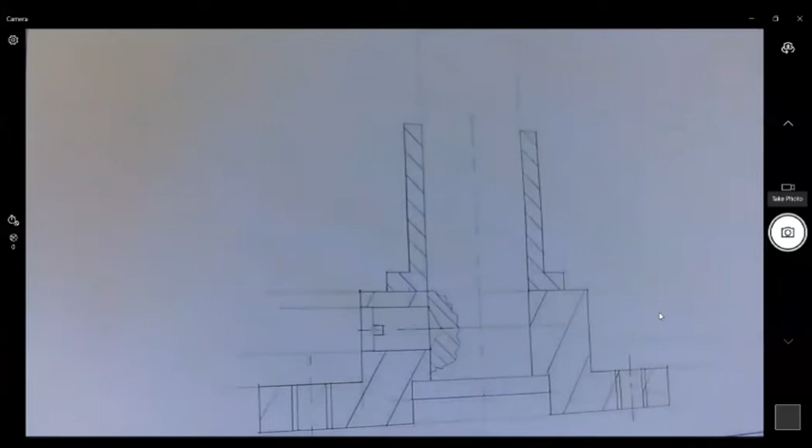All right. Just to recap what we have done for the last 2 days. We have started with mechanical drawings. Last year we did it as well, but last year was a lot simpler and the focus was more on drawing the different views. Now that we have practiced different views, what was added this year is that you get a 3D or exploded isometric view of a mechanical component. In this case, it's a pulley.

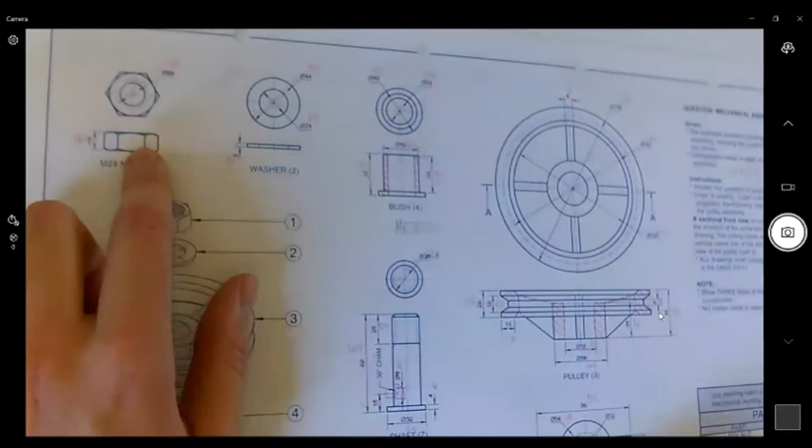What you also get is an orthographic view of two different views, the front view and in this case, the top view. But they only want us to draw the front view. Hence, I crossed out all the views I don't have to draw, but not so that I can't see the measurements. The scale is also 2:1, so I had to go and multiply all my measurements by 2.

Then we quickly planned out our hatching, because if you cut something in half in EGD and you have to represent that on a drawing, you add hatching lines. Think back to when we did civil, the houses. If you show the foundation, you would add symbols to represent different types of materials, like natural ground, like cement, like wood, etc. Same thing with metal or any type of mechanical component.

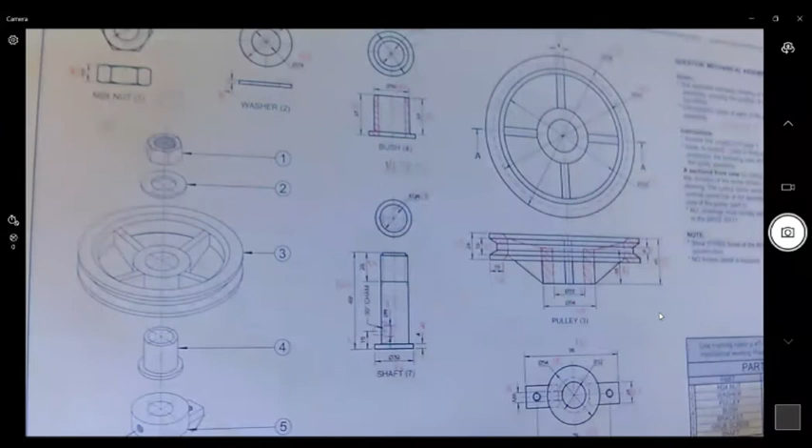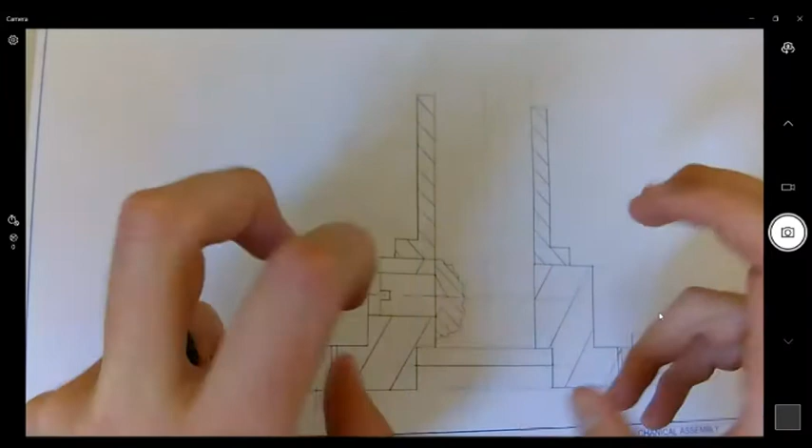Yesterday, we started by drawing the shaft, but an incomplete shaft, because I always start with the shaft, but I complete it at the end as well, because that will prevent me from erasing too much stuff at the end. Then I started sliding the components onto my shaft as you would have done it in real life. So it's the bracket, the grub screw, and then we ended with the bush. And I've added the hatching as well.

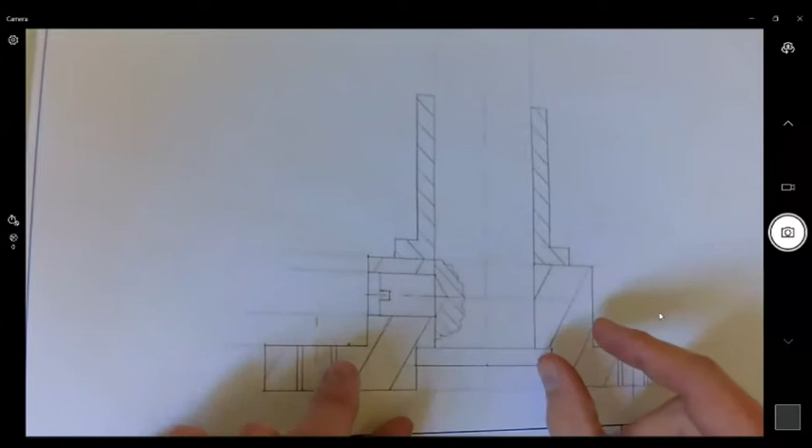Note that each new component's hatching looks different and drawn at a different angle, and the spacing between them is different as well. The reason we do this is every component is a unique component that has to be distinguished in that way. So you can't have the same hatching for different components. You just change the angle or the gap between the lines.

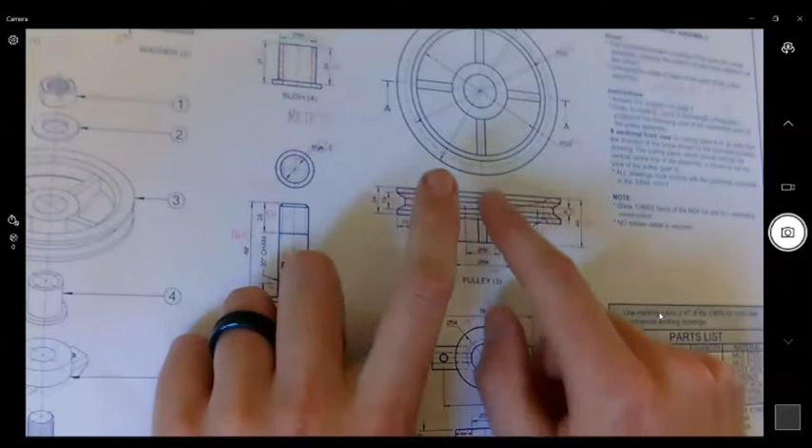Today we're going to start by drawing the pulley. Now remember, the pulley looks complicated, but for now, let's just draw the outline and then we'll draw the inside and add the hatching. So we don't have to draw all those lines. All those lines would only be necessary if we had to draw this pulley without the sectioning. But because we cut it, it's simpler, not simple, just simpler. So we're basically going to copy this pulley. It's going to take a while because there's a lot of turns and bends and angles we have to work with. So let's do this.

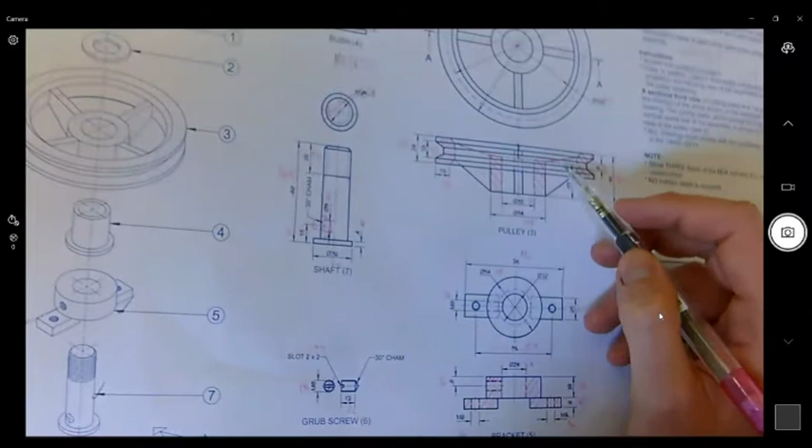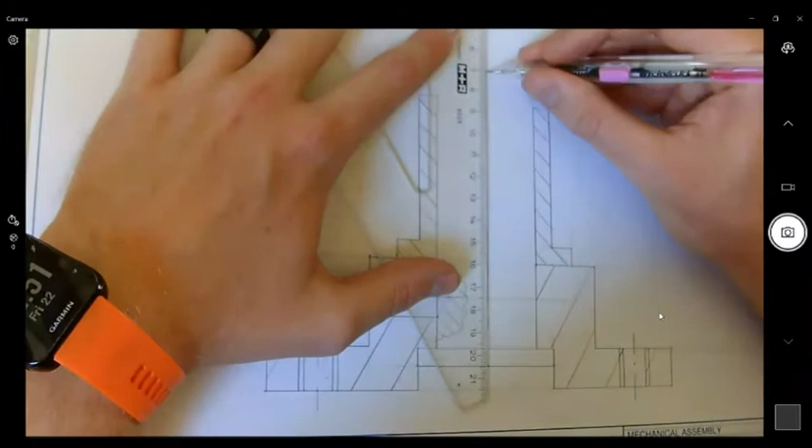Now above that pulley, there's a bit more space left. So I'm trying to figure out what the height is from there upwards. So let's see. What I can also do is take the total height and work from the bottom upwards. So it's 90. I need some more center line. Because that's the top part of the pulley. I'm going to work from there and draw downwards.

Okay, so what's the length of the pulley or the diameter? It is 316. Divide that by 2 and you get 158.

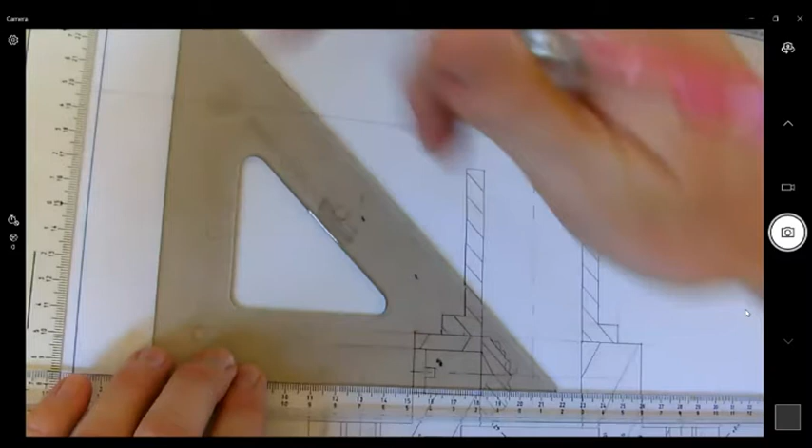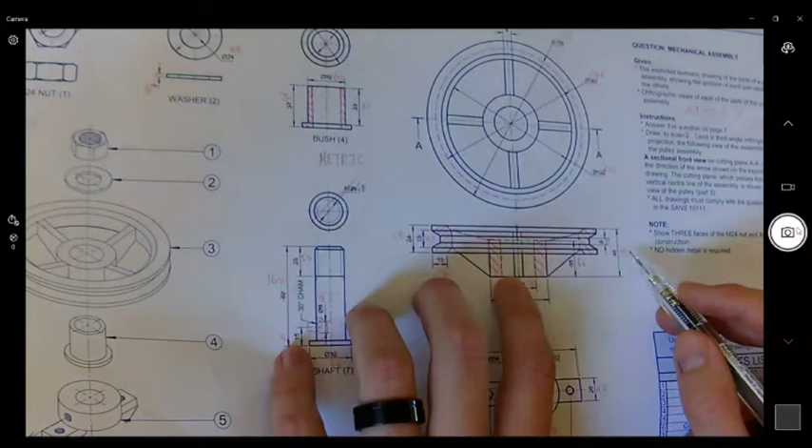Sorry to stop, sir, but where did you get the measurement for the height from again? Good question. And guys, I will try to remember to open the floor up for questions, but you can also ask in between. So the height I got from there. Next to the pulley, from the bottom to the top, you get 90. And I can see if I look at the height of the bush, it fits exactly inside the pulley. It's only this little base that sticks out.

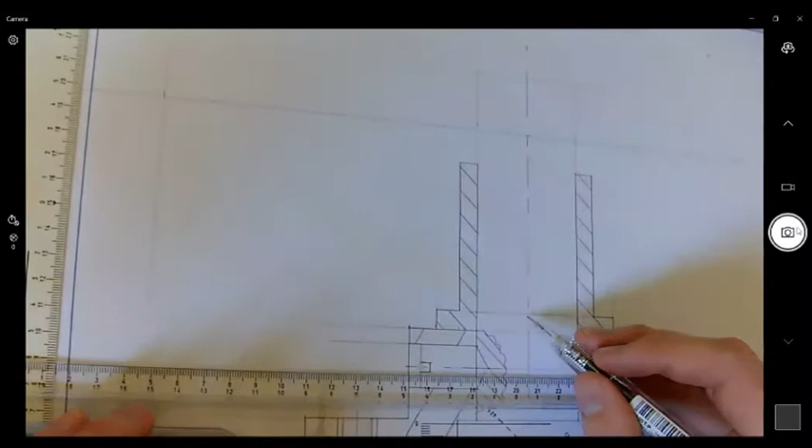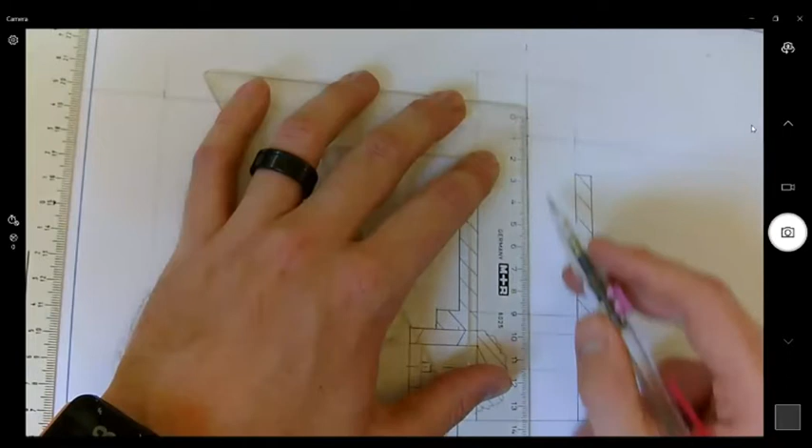So what I did is, if the height of the pulley is 90, I measured from, oh wait, I think I might have done this wrong. Hold up. So from there, above the base of the bush, we measured. I think I made a mistake, so it's good that Hannah stopped me. Yep, I made a mistake. There's the height. Sorry, guys. Okay, so it's 90 from above the bush. Thank you for stopping me. I almost had to erase a lot of stuff later on. Let's try this again.

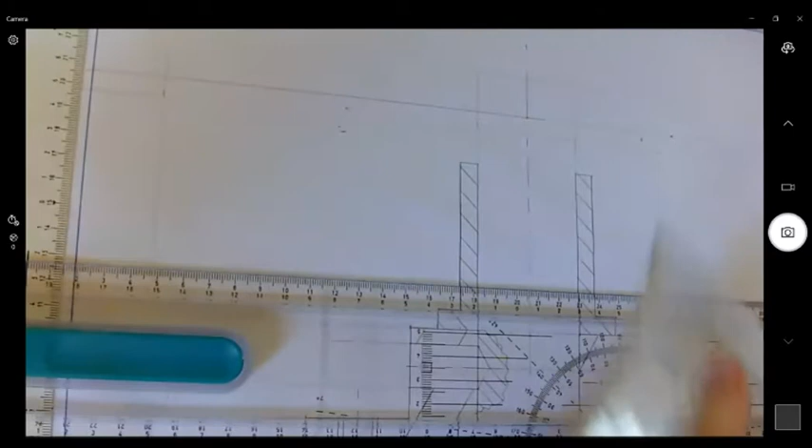Okay, so there's the, let's see if I can move this a tiny bit closer. Not closer, just that you can see the whole thing. There we go. I'm going to start moving downwards. So what I'm going to focus now on is that side and this side. So the outskirts of the pulley, that groove of the pulley on the outside.

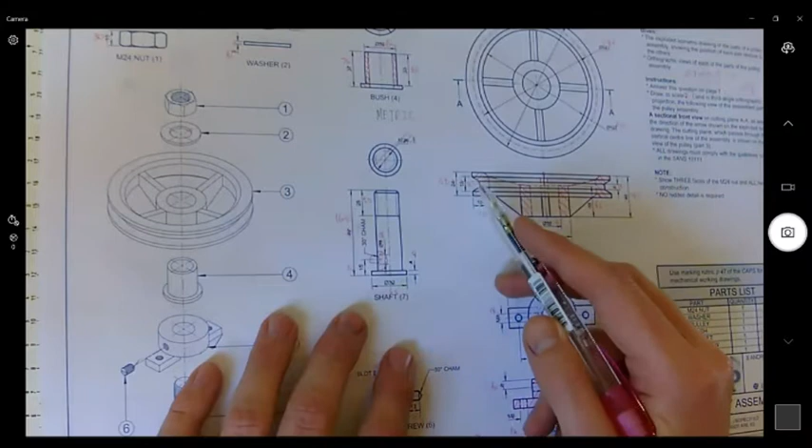Let's first work it out. The total space is 48 and the inside is 30. So 48 minus 30 gives me 18. And then there's 2 parts. So 18 divided by 2 gives me 9. Okay, so it's 9.

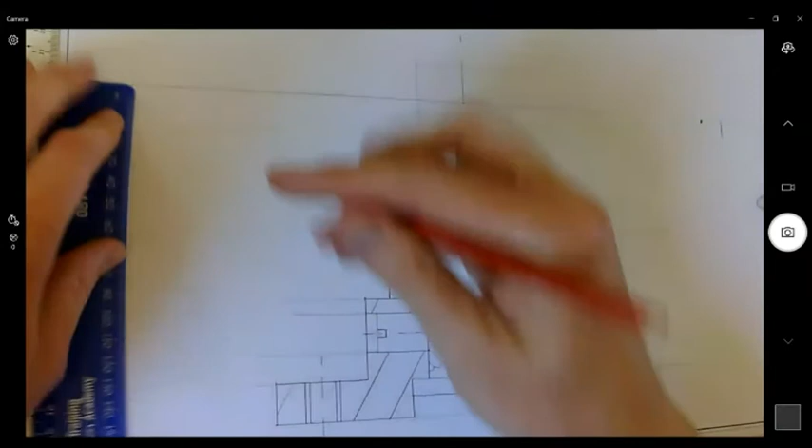I'm going to darken this part as well because it's part of the drawing. It's not going to be cut away, but I'm not going to go over the area where the shaft is because that will be removed. Now so I've done this part.

So this is done. Sorry, I think it's the camera. Sorry, guys, the camera looks like it froze.

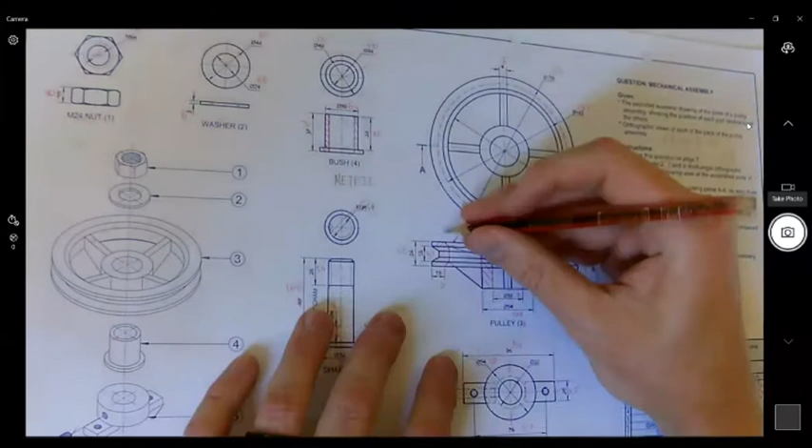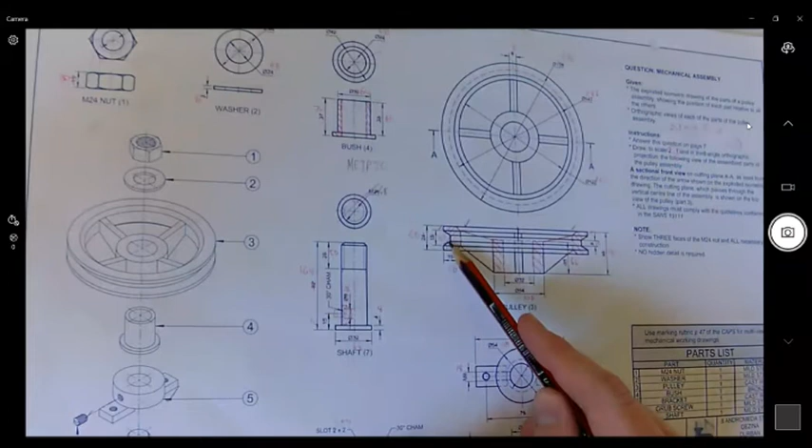There we go. So I've done this part, I've done that part. This is done, this is done. Now I'm going to focus on the inside. Now, they didn't give us an angle at which to draw it, but they did give us a size if we look at that part there. Now, let me just figure this out. Where do we get this? I'm just looking for this part there, the distance. Don't worry, we'll get it soon.

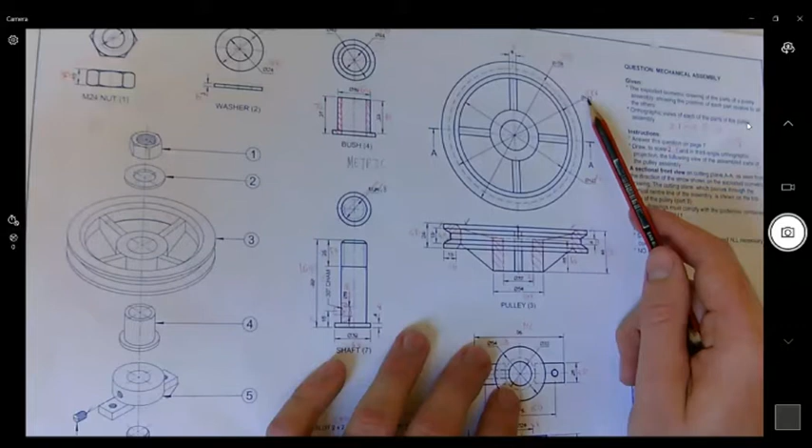Oh, it's this. So that hidden detail there represents that groove here. So the hidden detail is 286. So halfway, that's 143. So what I'm going to do is I'm going to put my ruler down on 143, and then 143 and make a mark on the outside. So that gives us a space of 15. So on this side, the same story. Can't see the line. Let me just make it a bit darker. 15.

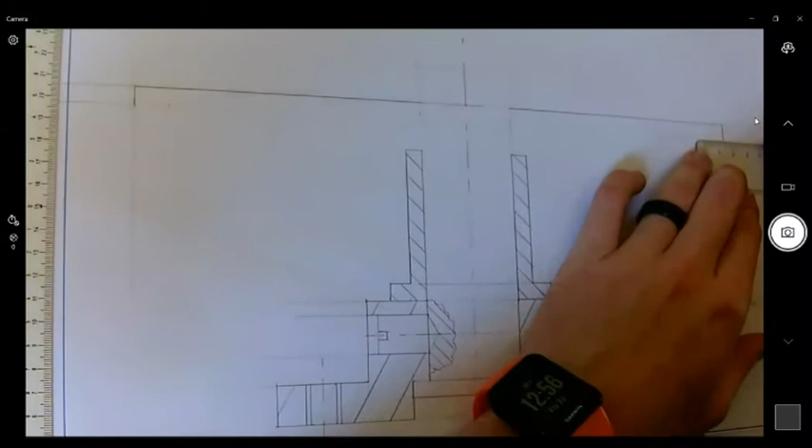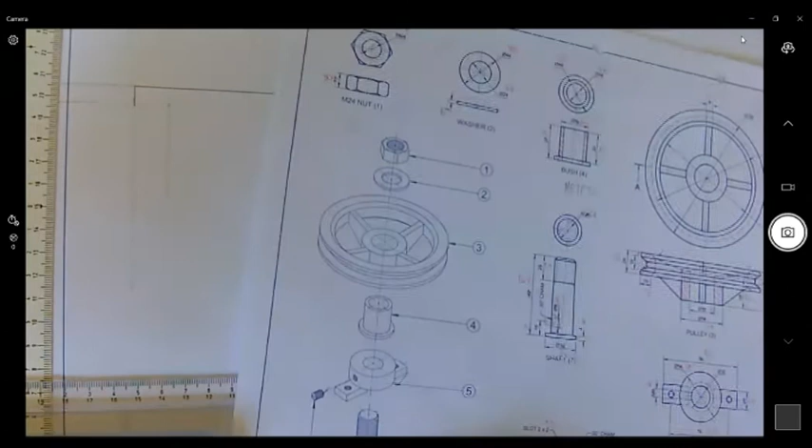Okay, we're still busy with that groove in the middle. Now, what's the gap? Let's just check. Okay, so the gap, I'm looking there. So the gap in the middle is 12, and then we can take 30 again. 48 again. So 48 minus 12 gives us 36. 36 divided by 2, that gives us 18.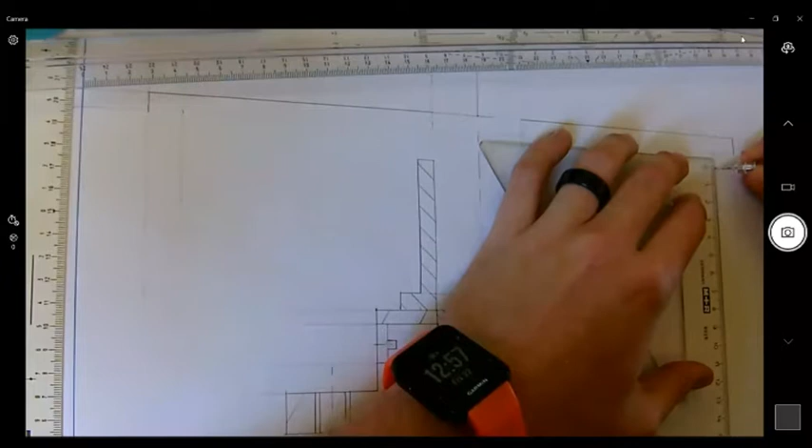So the groove starts there, and it has a height of 12. Now I'm not going to do it on the other side again by measuring it. I'm just going to project it. So I'm going to take the points there and put it on the other side. Now, I'm just going to first connect a few lines so we can start seeing the picture itself.

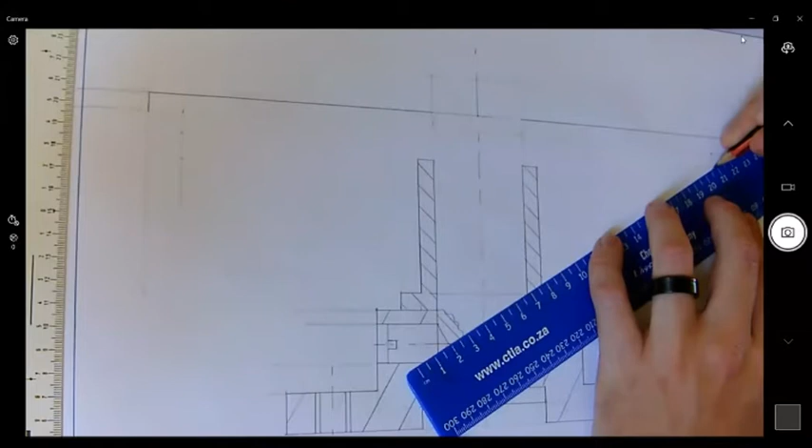Okay, so it's taking form, but we're not there yet. But luckily, it's symmetrical on the bottom side, so I don't have to go and do any calculations again. I'm just going to take these measurements. So that is 8. There, and then the top, this part should be the same. So that is 9 and 9.

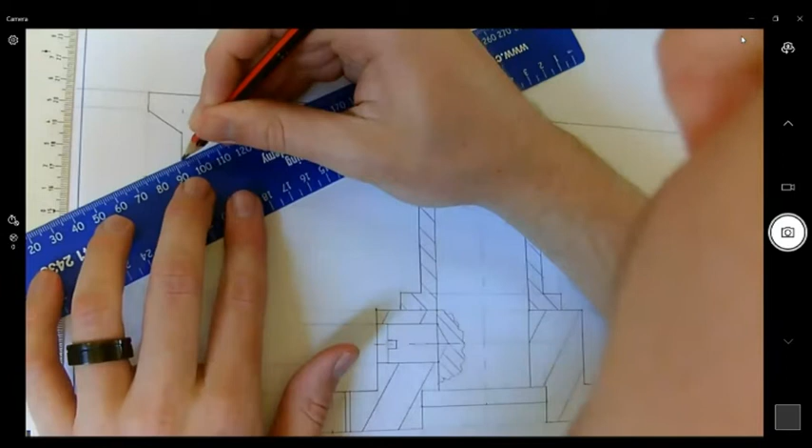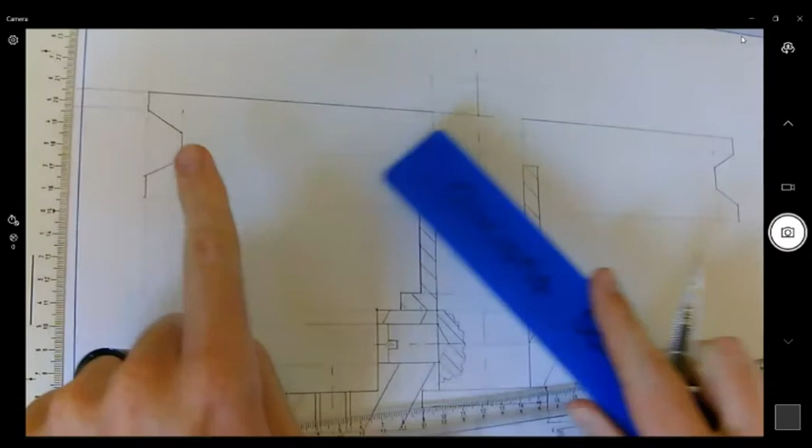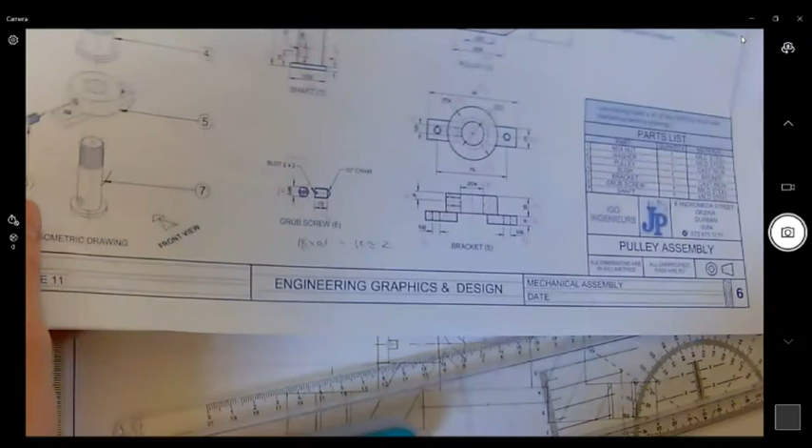Yeah, there we go. This pulley, it's starting to look like a pulley. Okay, I'm not going to darken the line at the bottom yet because there's a few things that still need to happen there. So I'm just going to draw a light line for myself. Okay, there's the outside. Now we can start adding the detail that's left behind on the inside. So next thing I'm going to do is that part there on both sides. Now to work it out, oh, they gave it to us, so we don't have to work it out. It's given to us. It's 26.

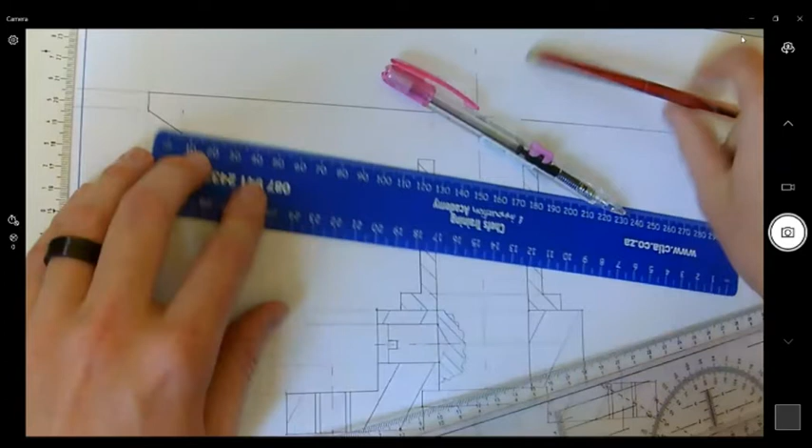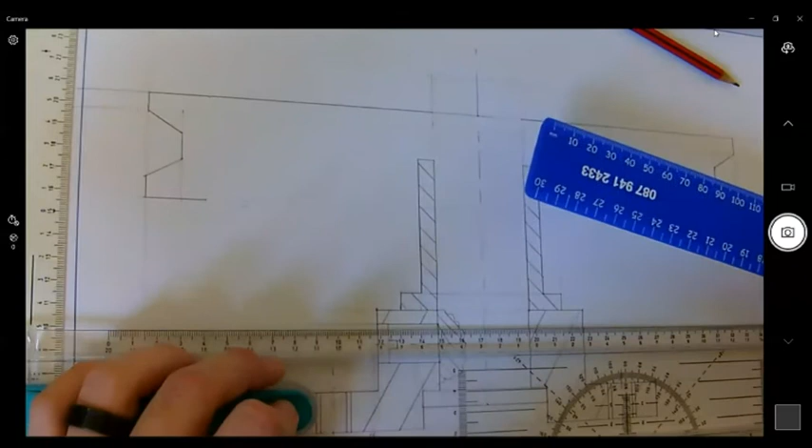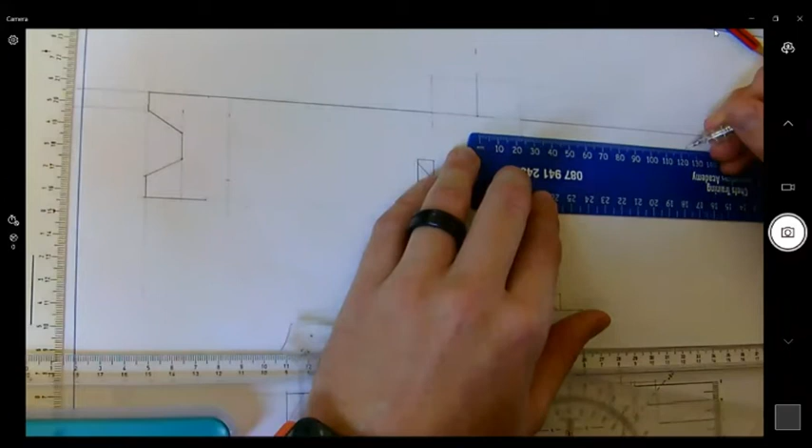Now I'm looking for that part there. So we've got that. Oops, you can't see it. Sorry. I'm looking for that part. I have that part. I'm looking for the distance there, so from there to the outside. So let's see. It's this diameter there. So that is 244. Halfway is 122. Just double checking. Yeah, good. 122. Them together.

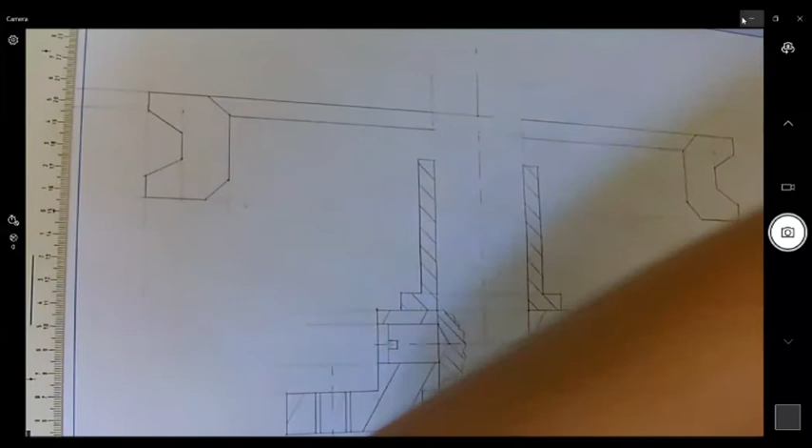Okay, there's the two outside parts of the pulley. Then there's going to be a line here at the top. Just going to show it to you. This line, I'm going to explain to you now where I got this from. Okay. That line at the top stays there because if you cut this pulley in half, you'll still see the back, that ledge, if I can call it a ledge, you'll still see it. This is what you're looking at. It's that ledge of the pulley at the back that's left behind when you cut it.

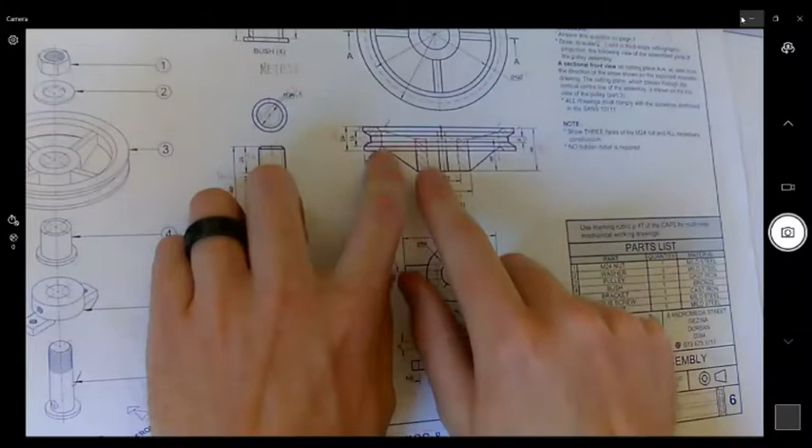Okay, now I'm going to add the support structures, these structures, the hidden detail parts. They're going to now be added. So it starts there and it ends at the top of where the bush should be, but on the outside. So let me just first add those two parts.

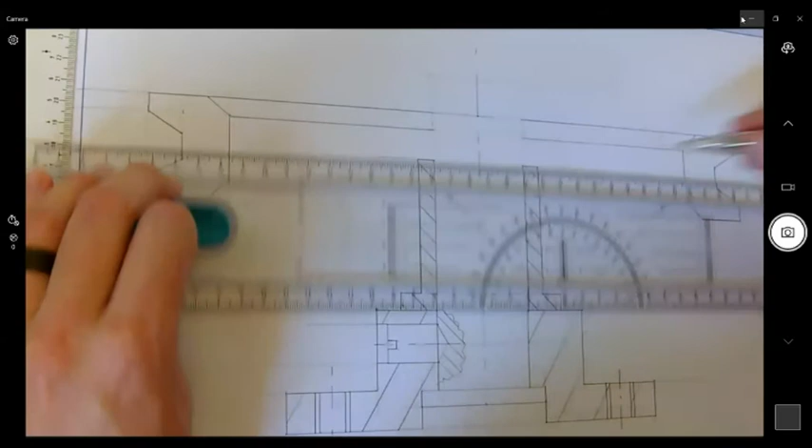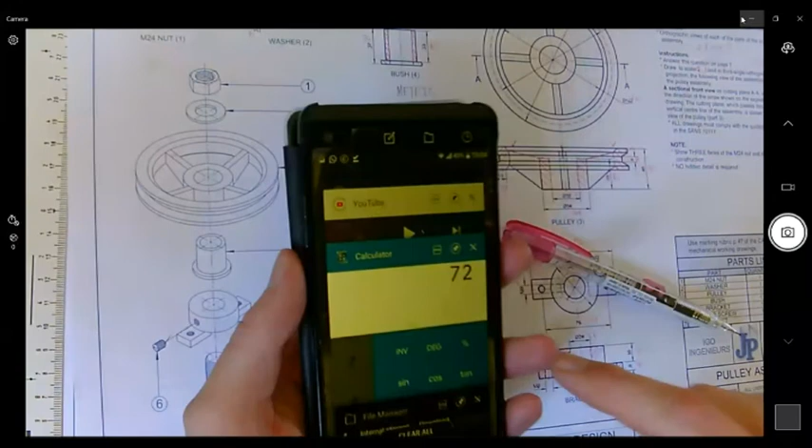Now to work them out, where you get them from is the inside is 64 and the outside is 108. So if I work this out, so 108, my calculator. Okay. So 108 minus 64 gives me 44, but there's two sides, so divided by 2. So 22 and 22.

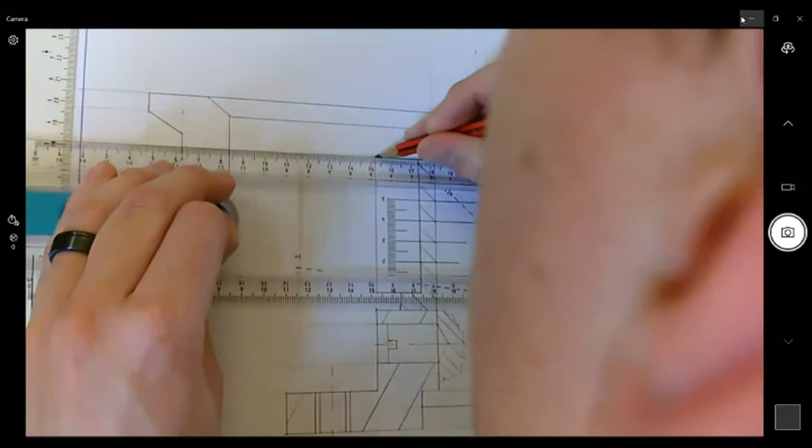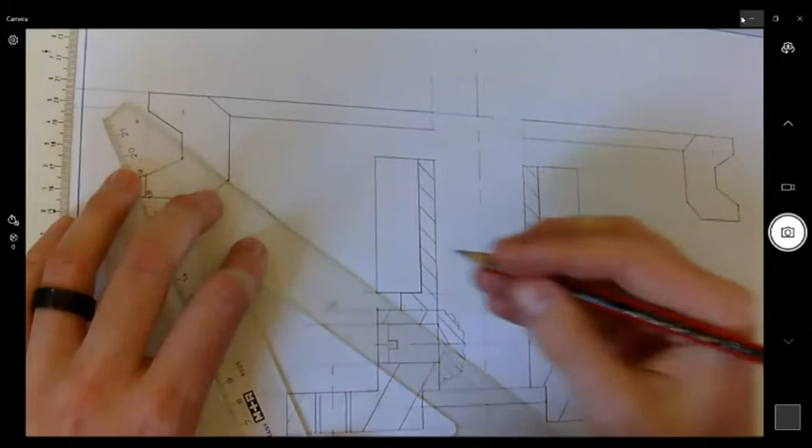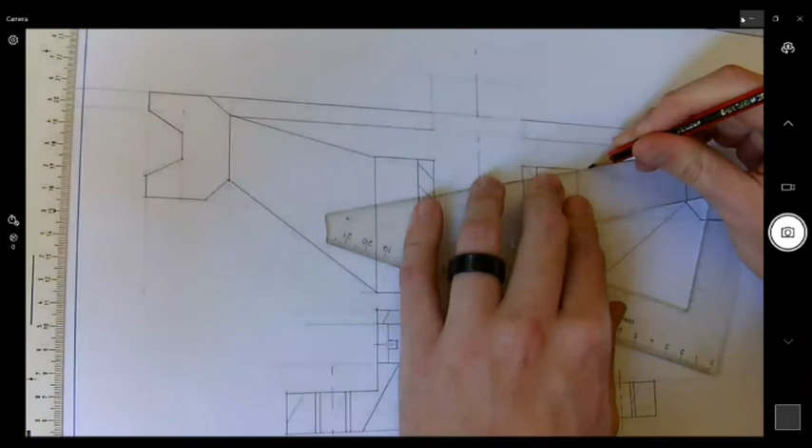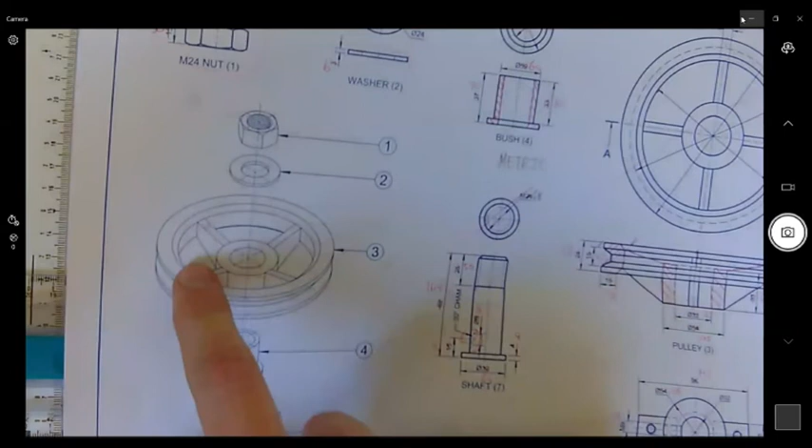Now let's just connect the brackets. We are almost done. Then at the bottom, these two corners, it looks like little triangles, will also be visible because if you go back to the drawing again, just like there's a groove at the top, at the bottom, at the back, you will also see a part of the pulley. So that's, again, the back that you'll be able to see.

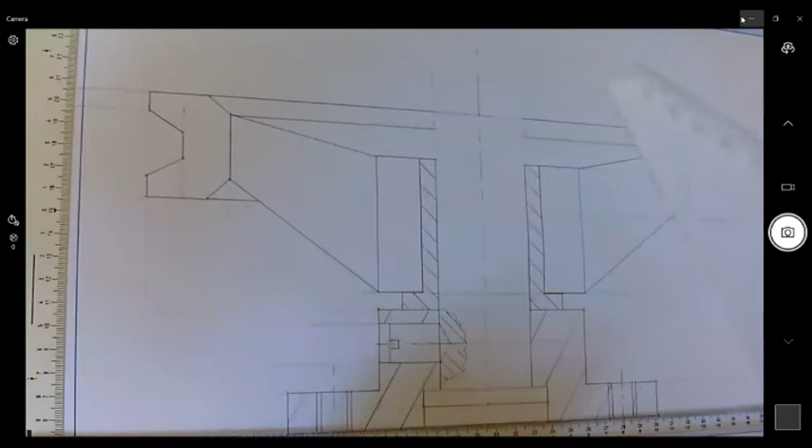Is there anything else I'm going to check if what I missed? No, just need to hatch it. So I'm going to hatch it, and then I'll quickly open the floor for questions about what we've done now in class, or about yesterday. That's also fine. So let's check. I'm going to use this. No, I can't use. Yeah, I'm going to use this angle. No, because that bush is similar.

So let's do this. Now the pulley is the biggest part. So I'm going to draw it. This is a better angle. I'm going to draw big spaces between my hatching. Otherwise, I'll take hours drawing it. So make it nice and big.

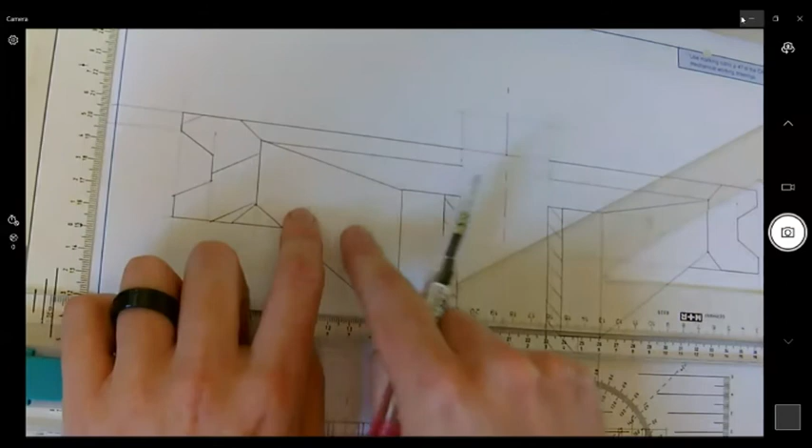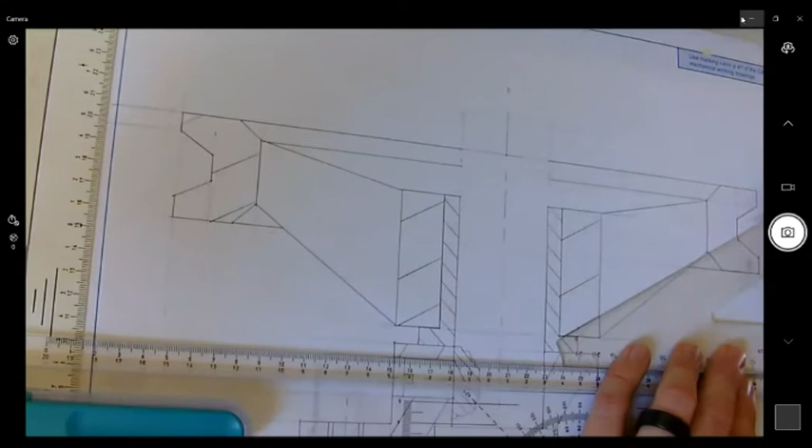This is cut, but we don't hatch it because this counts as a support structure. So it stays just the way it is. So any support structure, bolt, nut, washer, you don't cut it. They also call the support structure sometimes a web or a rib, as in a rib that you have in your body. That's something you don't cut or hatch. You cut it technically, but you don't hatch it.

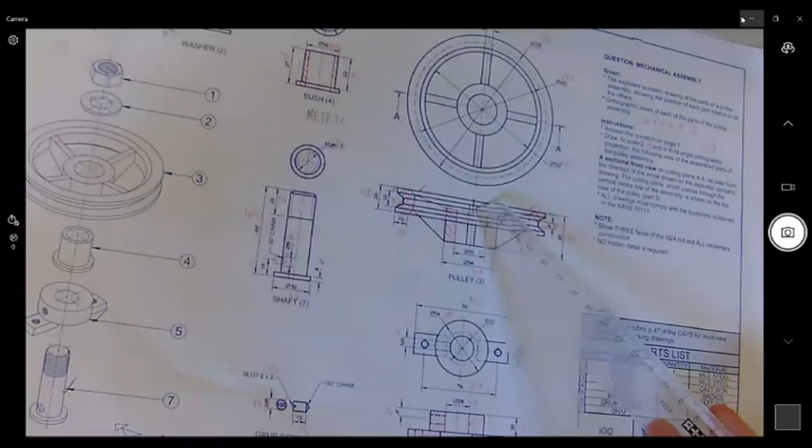Just want to go back to my planning. Yes. There's a support structure at the back. We won't be able to see it because the shaft is in the way. So this is it.

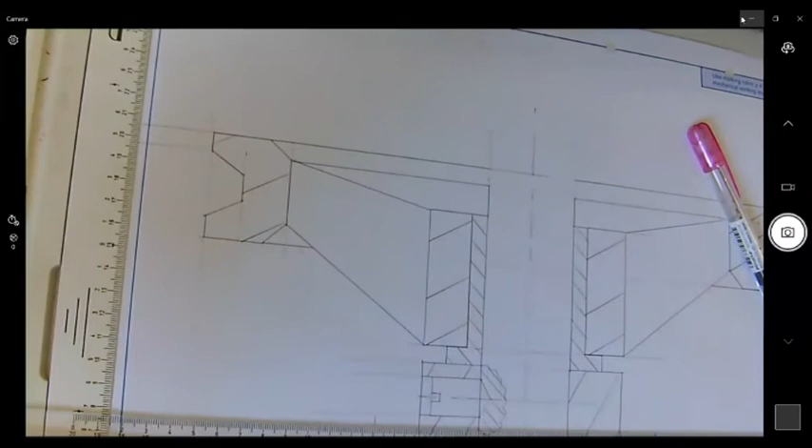I made a tiny mistake, but it's not something that crucial. I didn't consider that the nut will probably sit there. So I'll have to erase a bit of these lines. Not a big problem, but I just realized that might be an issue, but we'll get there now with the nut. I'm going to open the floor for any questions.

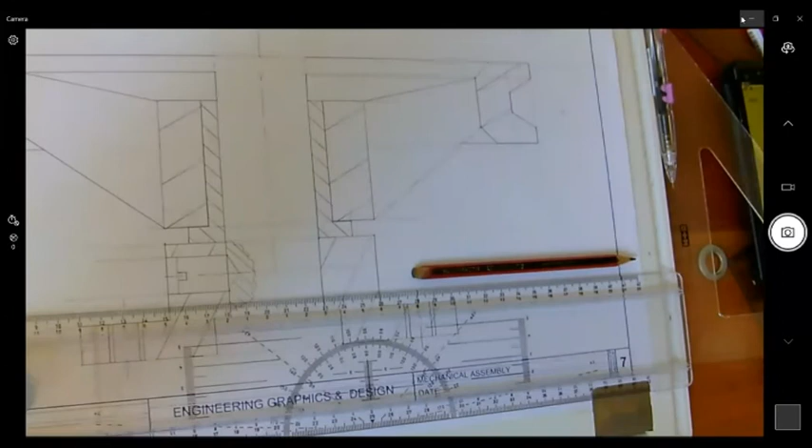Is there any questions about the pulley or anything so far we have done? The pulley was basically copying what was given, but knowing where to hatch, where not to hatch, and what do you see at the back of the pulley. Okay, is there any questions? I'm just giving a few seconds.

So guys, if you messed up somewhere, continue with the mistake, because you can learn from those mistakes and critically look at your own drawing and then tell yourself, okay, yeah, I can improve. This was correct. This was wrong, and so on. So it's a good idea what Hannah said, if you messed up, to go back to the video and then compare, like, oh, there's my mistake.

Something else I want to mention about mistakes. If you're in an exam, let's say you got 1 hour and there's 15 minutes left and you pick up a mistake in your paper, from my own experience, I would not correct the mistake.

Because if you erase something, think about if there was a mistake here and you have to go and erase, you will lose all that work you have done already. So in my experience, you lose less marks to complete a drawing in a test with a mistake than trying to fix the mistake and running out of time.

How we mark it, you will lose marks for the mistake, but only once. And then we mark your drawing with the mistake as if it was correct. So we only penalize you for a mistake once, okay, for every new mistake.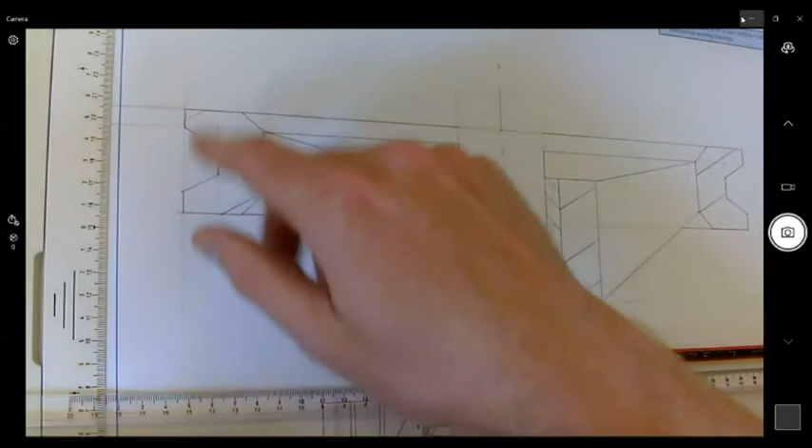So in an exam, you have to still decide yourself, is it worth erasing it? Maybe it's somewhere on the side and it won't influence the rest of your picture. Then you can go ahead and erase it. But if it's somewhere in the center, I wouldn't do it if there's not a lot of time left.

Obviously, if you pick up a mistake in the first 5 minutes and you've got almost an hour left, that's a different story. Then you've got time to fix it. So just keep it in mind. Ask yourself, is it worth wasting or losing time to fix the mistake, or is the marks not enough to do it?

For instance, every single paper that I give you should have a rubric and must have a rubric. And the rubric tells you which parts of the drawing gets how many marks. So let's say you pick up there's a mistake, but you will only lose, let's say, 4 marks out of 90. Then I would say you leave it, continue, and see at the end maybe if you can get time.

But it's better to lose 4 marks and complete the drawing than losing, let's say, 15 marks because you couldn't complete the drawing, the rest of the stuff. So yeah, you have to weigh the options.

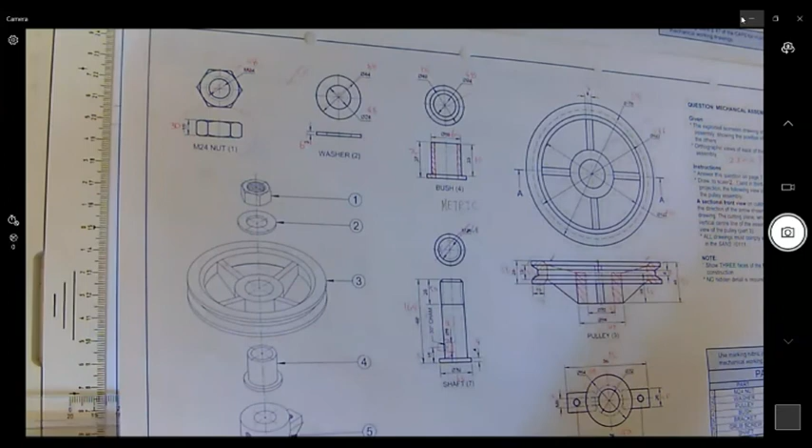Okay, we've got about 6 minutes left. I think what I'm going to do is, let's see at least if I can complete the washer. And then on Monday, to end the picture, I'm going to show you the nut construction. I would rather do it on Monday when we're fresh and back at school. Not physically, I mean back after the weekend. And because this is important, there's a few formulas you have to know. So we'll do that on Monday. So let me just finish the washer itself.

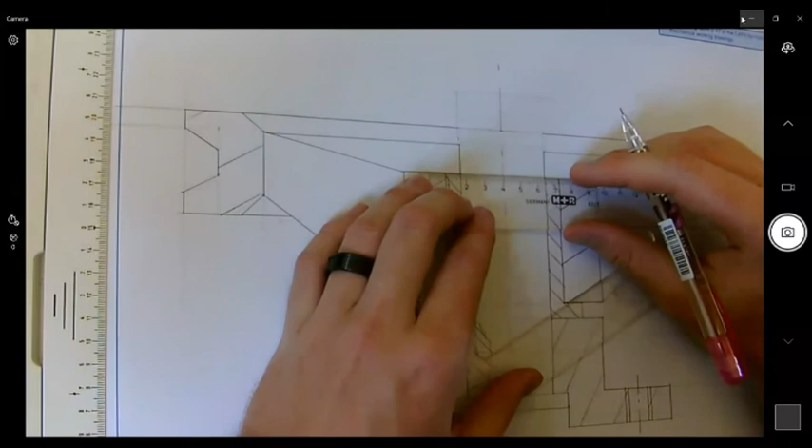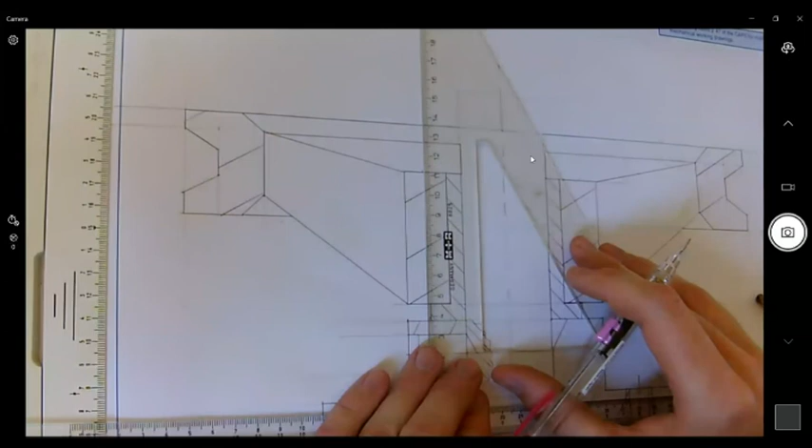So if I look at the picture, the washer fits onto the pulley. So the washer is going to be somewhere there. Not somewhere there, it's going to be on top of the pulley there. So we've got a washer. It has a diameter of 44. So halfway is 22. The height of the washer is 6.

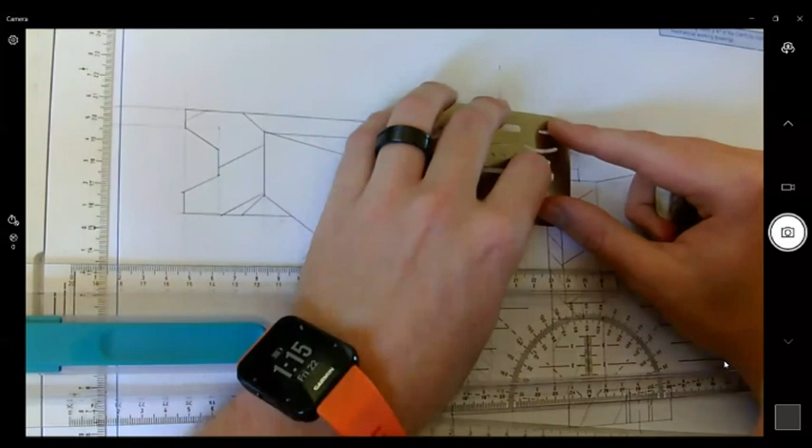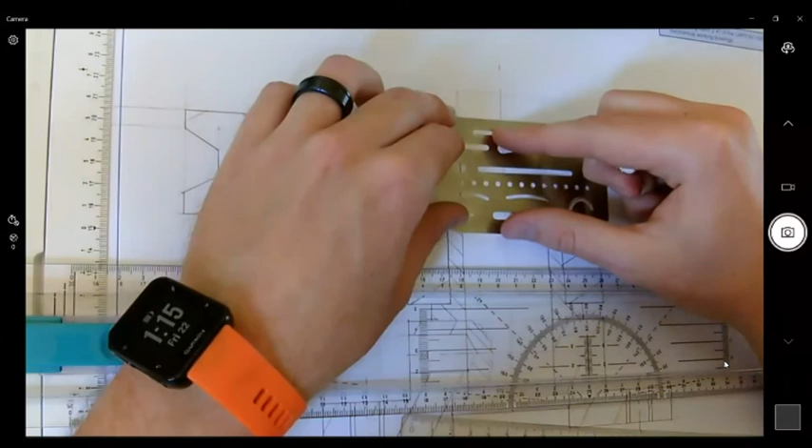Now a washer we do not cut. So what I'm going to do is those 2 lines I just need to remove. So I'm going to take my eraser shield and just erase it. There we go. Okay, that's it for today.

On Monday, when we're back for school and we're fresh, I'll explain to you how to add the nut and the formulas. By Monday, I believe MS Teams should be working and up and running fully. I'll still make use of WhatsApp and my ebooks as backup. But then hopefully on Monday, when we're done in class with the nut, you're going to send me a picture on either MS Teams or WhatsApp.

We'll see what happens. Not so that I can mark it, but I can just have a look at your picture to see if you actually did it. Because if you didn't do it, then you're behind. Then we'll have to make a plan. And B, that if there's a mistake, maybe I can see the mistake and then just tell you, okay, there you made a mistake. Or if you just tell me, sir, I know what the mistake is, I just messed up. Then I know at least you learn from your mistakes and you'll do better with the next practice drawing. Okay, so that's for Monday.

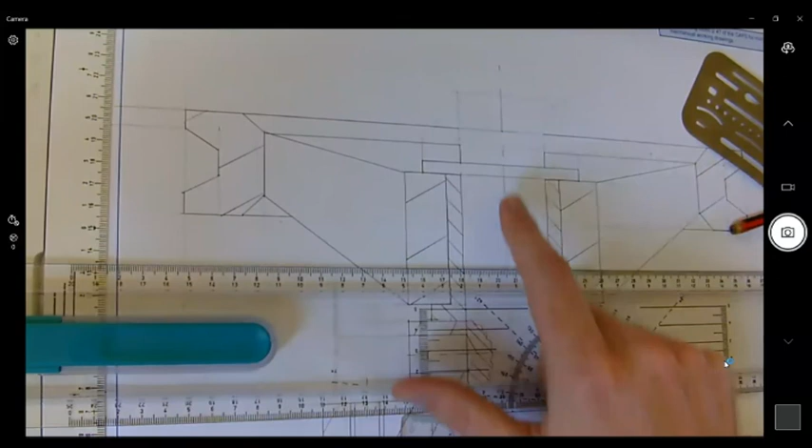Monday, we'll just have to finish the nut on top, and then that's the picture. We'll just check if we have to, I think we have to add 1 label, and that's about it.